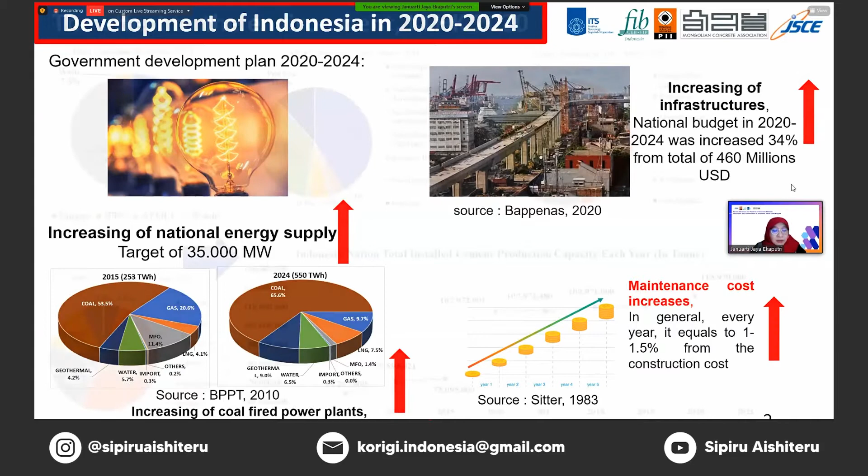As Professor Nakamura explained yesterday, we have to spend more attention maintaining our infrastructure during its service life. So it is not cheap, because every year it costs around 1.5% of its construction cost. Actually, we have another problem too, as also explained by Sagawa Sensei.

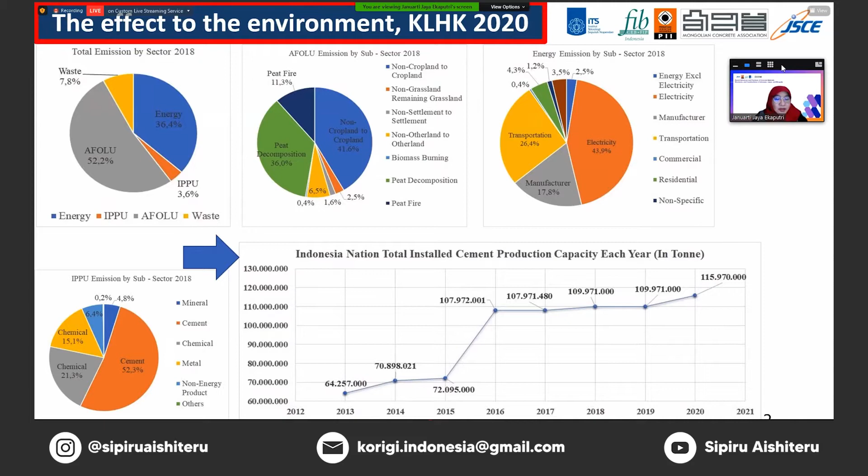Here, we face some problems to be solved. We must decrease emissions and consider the environmental problem. In the concrete industry sector, sometimes using river sand is not recommended because of the instability of rivers in some places. As we are in a tropical country with a very long coastline, durability and hot concreting are also additional problems.

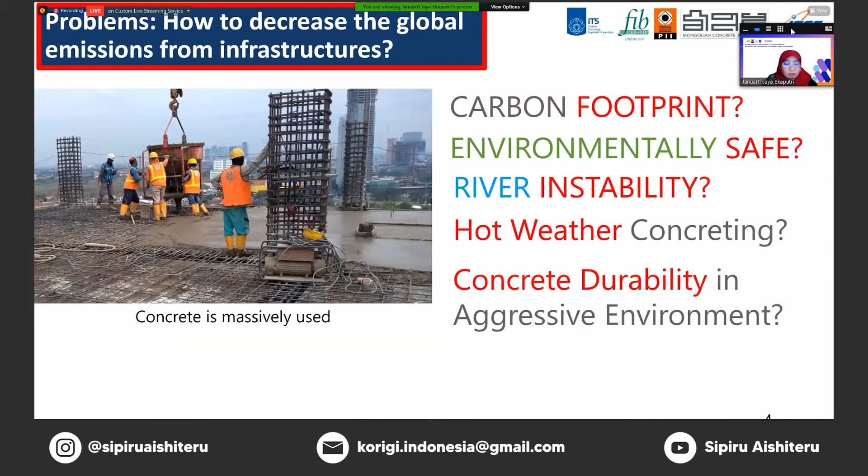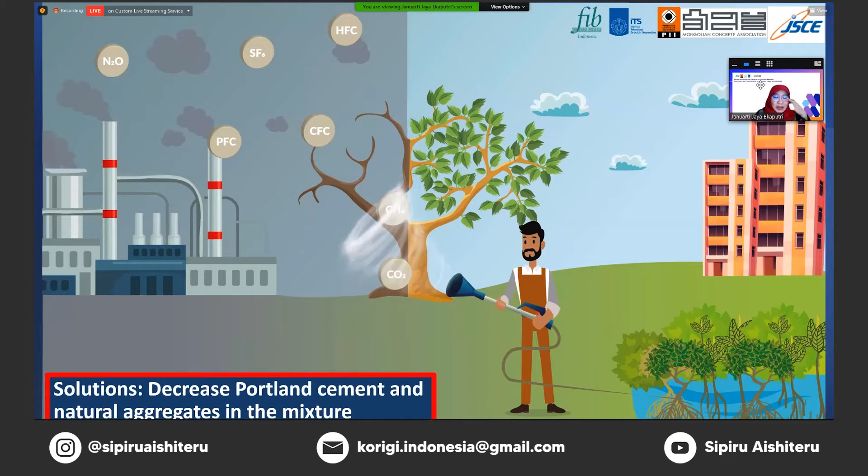Let me show you our experience utilizing coal ash as much as possible to solve this problem. We increased the utilization of fly ash in concrete as a main replacement, as a cement substitution, up to 50% by cement weight. It is not as much as Sagawa Sensei's explanation before, but we have done our best. It has both positive and negative effects on the concrete.

It increases the strength at later age. It also lowers the porosity and decreases the temperature of hydration. However, as a pozzolan, it has lower strength at early age and contributes to high shrinkage, and makes the workability lower if we use more than 30% by cement weight.

We also use bottom ash as a sand replacement up to 25% to get its property of internal curing in the concrete. But of course it has negative effects on the concrete, very similar to fly ash. And we know it is a porous material, so it must contribute to higher shrinkage in the concrete.

Then we have to find solutions. We have to find the antidote for the coal ash effect. So we use microbes in the mixture. In most of our experiments, we use Sporosarcina pasteurii as the bacteria, especially for concrete.

And then we use these microbes, and it is also found that the microbes create gas as a metabolism product during casting, so it increases the workability of the concrete during casting. However, it requires a lower hydration temperature.

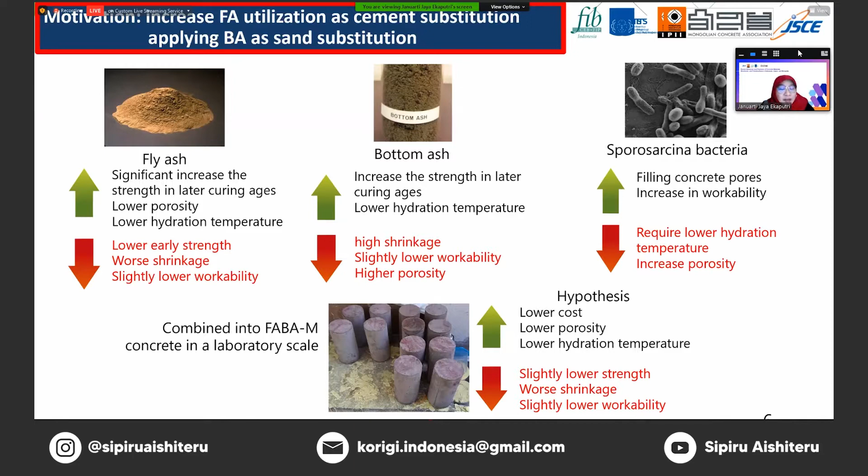I have to emphasize here the microbe selection. Obviously we have to use non-pathogenic aerobic bacteria; we don't want to get sick because of this kind of bacteria, so it should be non-pathogenic. It has to work to fill the pores if oxygen exists. As concrete containing lime, the pH may be a bit higher, and the microbes have to withstand high alkalinity. So we isolated the bacteria from a lime source, a very local place in East Java.

This is the reaction that occurs, I will show you the reactions. When we insert the microbes in the concrete, the carbon dioxide from the bacteria can react with portlandite. There is also the urease enzyme, and it reacts with the portlandite to create calcium carbonate. So the calcium carbonate precipitates in the concrete pores to make the concrete denser because it reduces the concrete pores. Okay, I will go to the next slide.

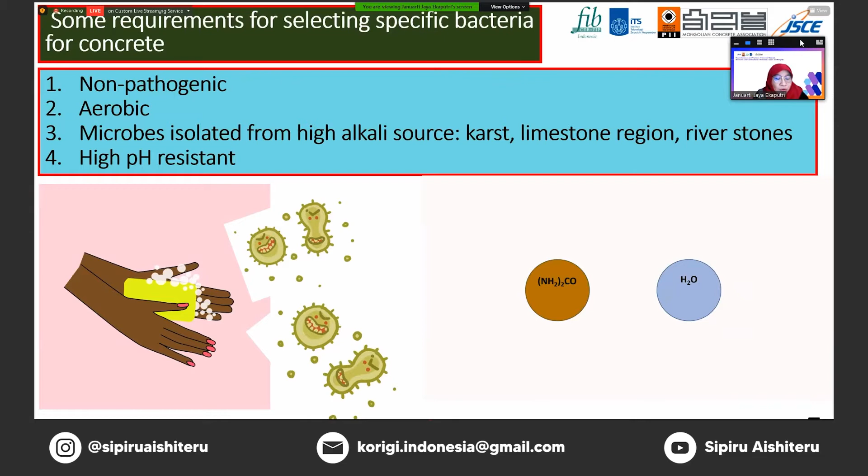We have found that some local bacteria in Indonesia can be very useful to increase concrete performance. We have Bacillus subtilis, and even Bacillus safensis, to produce calcite. We can even find aragonite in the concrete pores, which is a very hard and strong material. It fills the interfacial transition zones in concrete, so there is no gap between the aggregates and the concrete matrix. We were lucky, during the SEM analysis we captured the binary fissions of the bacteria inside the concrete.

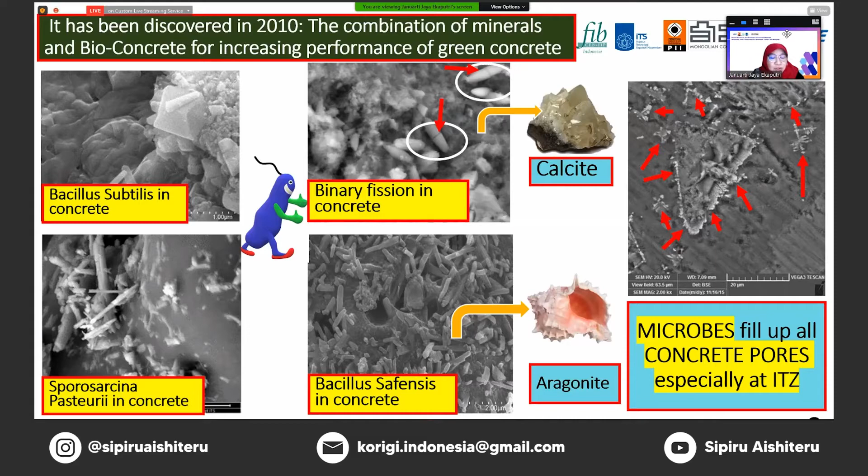We have also another innovation using sodium hydroxide to increase the pH of concrete. Usually cement contributes to a pH of 12.5 to 13 in concrete mixtures during casting. By using fly ash and bottom ash, the bacteria may decrease the pH in concrete. So we use a very low concentration of sodium hydroxide, 0.03 molar, introduced during casting and also as a water substitution. It also increases the reactivity of the fly ash.

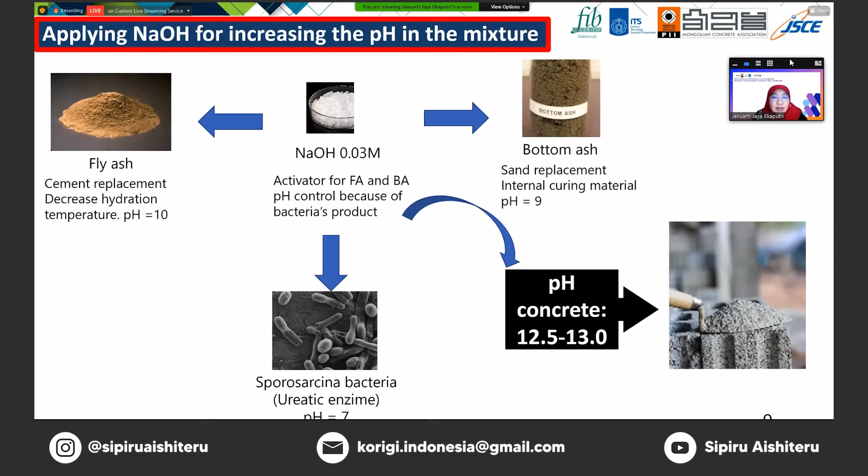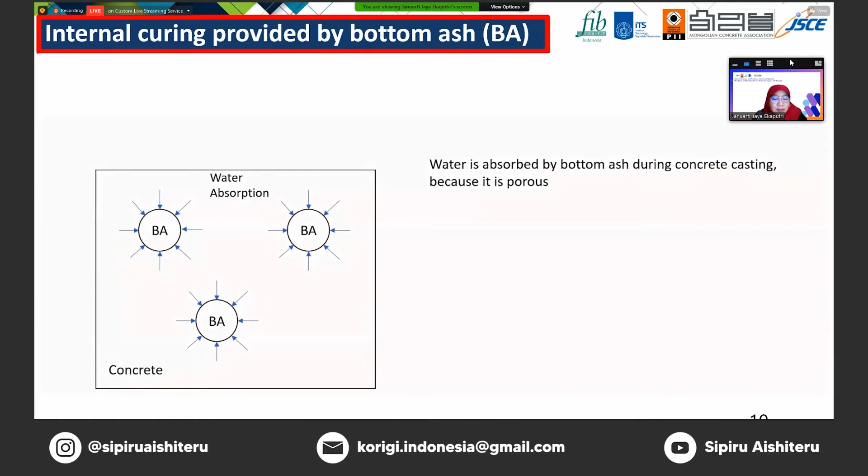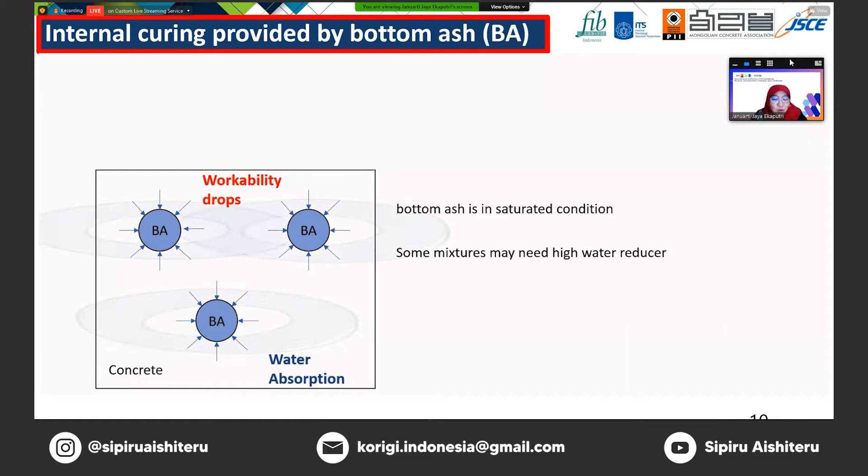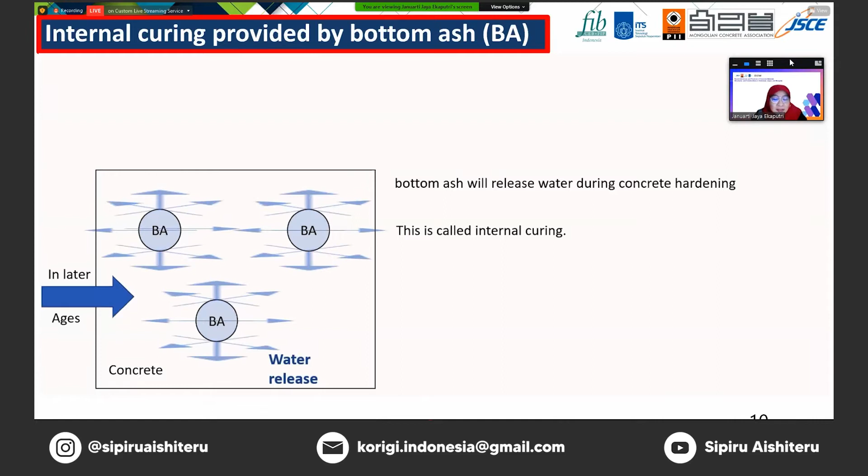I also have schematic simulations. This is the internal curing effect from bottom ash that we expect to occur during the hydration of the concrete. It works as a sponge: it absorbs water at the beginning, lowering the water to cement ratio and maybe the workability, but then it releases moisture gradually at a later age. This is called internal curing, and it contributes moisture to guarantee the next chemical reactions because of the pozzolanic reaction and the bacterial activity.

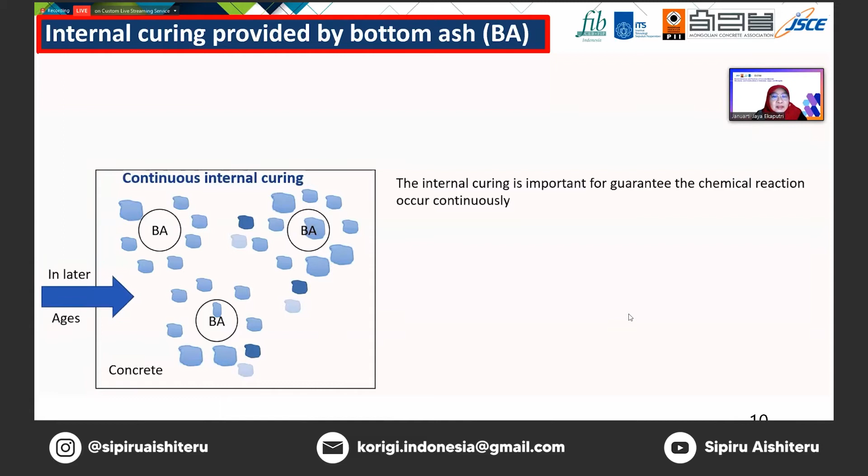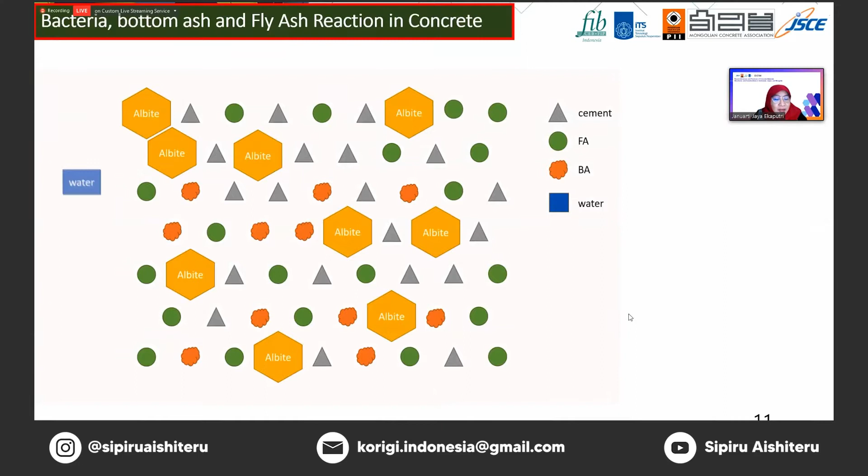This is a bit complicated, but I tried my best to make simulations of the schematic reactions during the first hydration and at a later age of the concrete using bacteria, sodium hydroxide, and coal ash. The bacteria produce CO2, which reacts with the portlandite to produce calcite, and the fly ash reacts with the portlandite to produce new calcium silicate hydrate. At the end we have a denser concrete, and the bottom ash continues to guarantee internal curing inside the concrete during the hardening process.

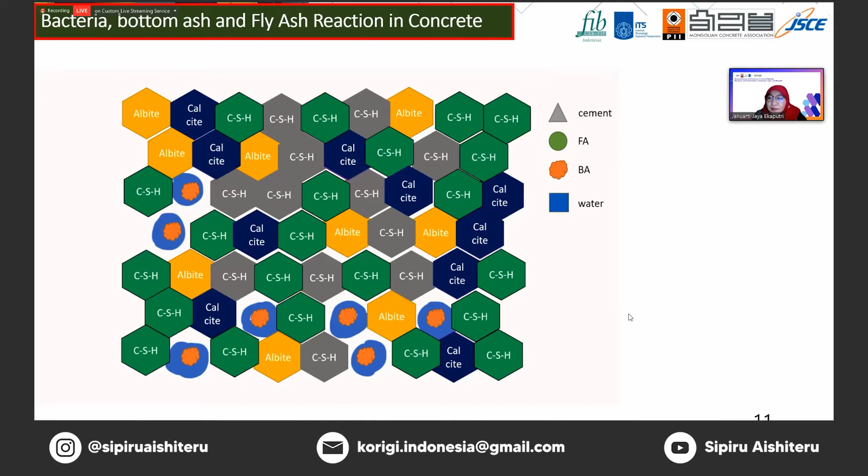In the next slide, in our experiment we use a mix design to obtain a strength of 25 megapascal in 28 days. As a cement replacement, class F fly ash was used at 40% and 50% by cement weight. Bottom ash was used to replace only 10% of sand by weight, but that's actually quite a high amount.

We made a certain sequence of mixing the materials during casting; it is very important because it affects the workability of the concrete. We place fly ash first, then mix with sodium hydroxide, then continue with all aggregates, followed by cement and superplasticizer, and also add water containing superplasticizer in the final mixture, and also put in the bacteria. We also use a different superplasticizer amount: black here is the non-bacterial concrete, and red contains bacteria, since we keep the bacteria content constant at about 400 milliliters per cubic meter of concrete.

Because of the different workability using bacterial and non-bacterial concrete, we used a different content of superplasticizer. For non-bacterial concrete we put 0.33% by binder weight, and we decreased the amount of superplasticizer to only 0.1% by binder weight for the bacterial concrete.

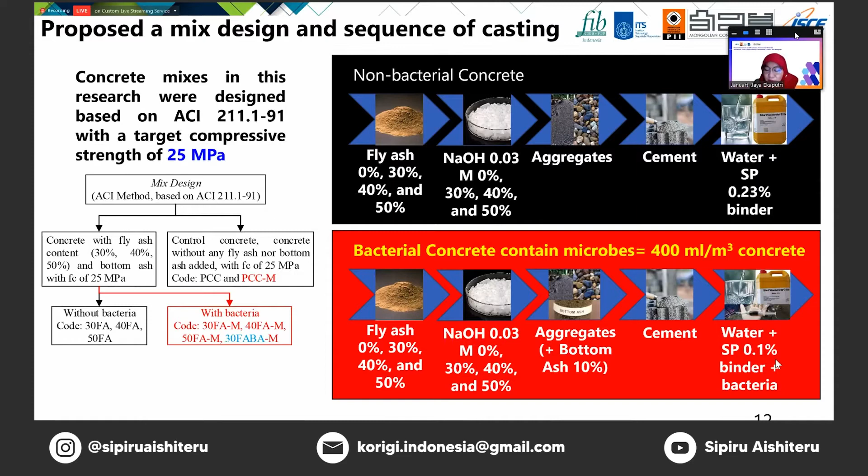We made cylindrical specimens for the strength test and the shrinkage test. We also prepared cubical specimens for monitoring the hydration temperature in 24 hours after casting. In total we have 272 specimens, and this is the result.

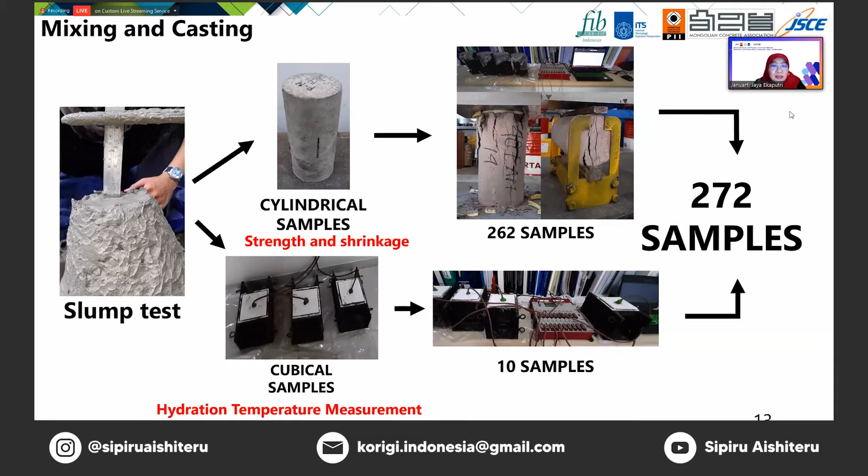The slump of concrete is very important to analyze. As the ash content increases, in order to achieve good workability for the slump target of 10 to 14 centimeters, we add water as the fly ash content increases, since the ash indeed absorbs water during casting. As expected, bacteria increase the workability of the mixture. We can see here, the blue one, the specimen containing 10% of bottom ash.

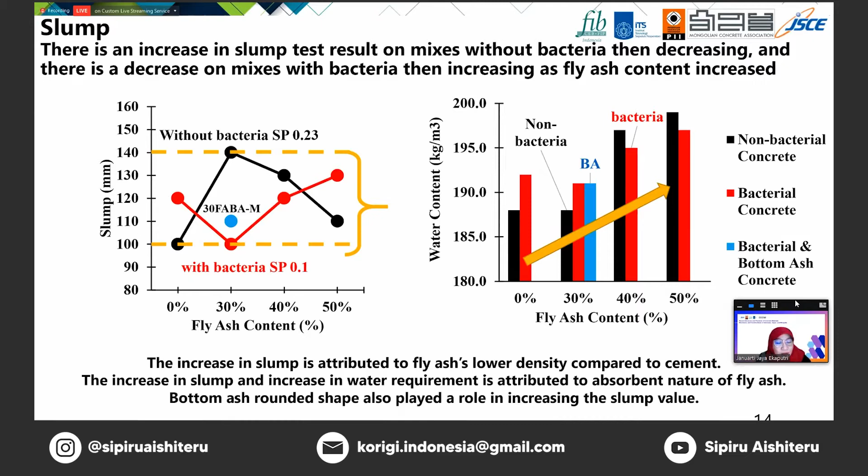And this is the result of temperature monitoring during 24-hour hydration sensing. The ash helps a lot to decrease the temperature, up to 13%.

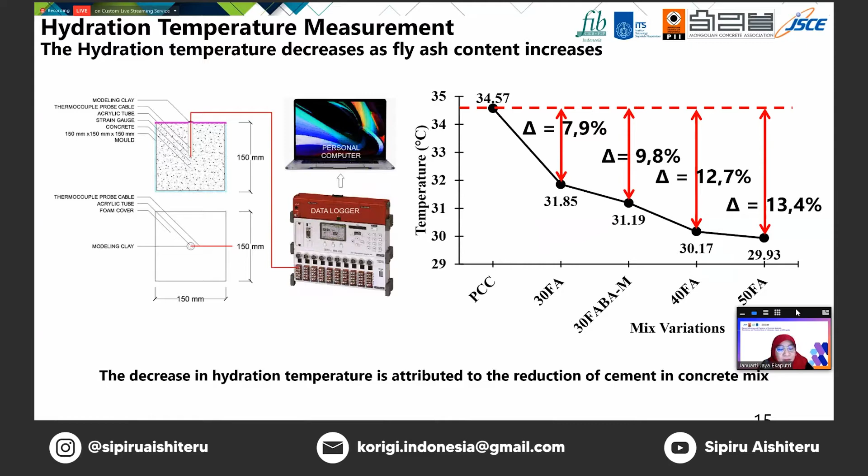Something very interesting to see, I used my previous experiment in Japan at the University of Tokyo to measure the shrinkage of concrete for 10 days. I put the embedded strain gauge in the center of the concrete, and we can monitor the shrinkage during hydration of the concrete for up to 10 days.

As the ash content increases, we add more water in the mixture, so the shrinkage increases too. But it is very surprising to see that the specimen with only 30% fly ash and the specimen containing bottom ash show lower shrinkage than the normal concrete. This is caused by the ash content and good compatibility and good compacting of the mixture during casting.

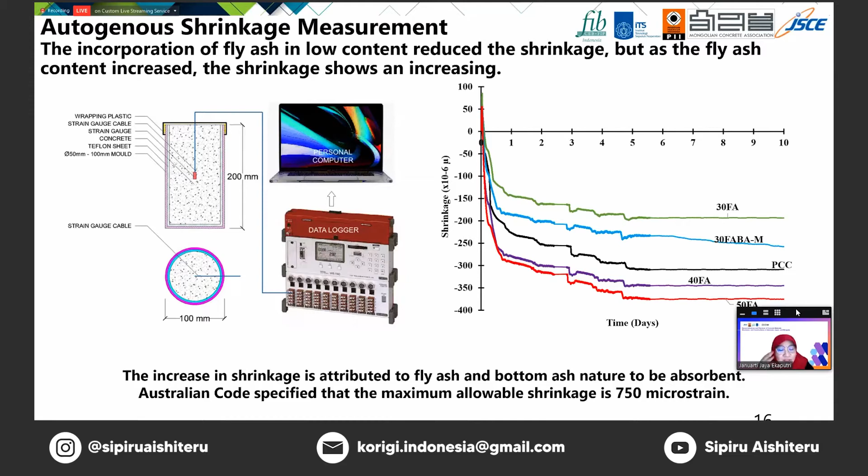It is also very interesting to see that if we do not control the slump, and just keep the water to cement ratio constant in our mixtures to guarantee moist curing up to 7 days, we found there is no difference using 30%, 40%, and 50% fly ash as cement replacement compared to the control specimens. There is also a report that using microbes in concrete, shown on the right side, doesn't affect the shrinkage. So there is no difference using bacteria or non-bacteria in the shrinkage measurement.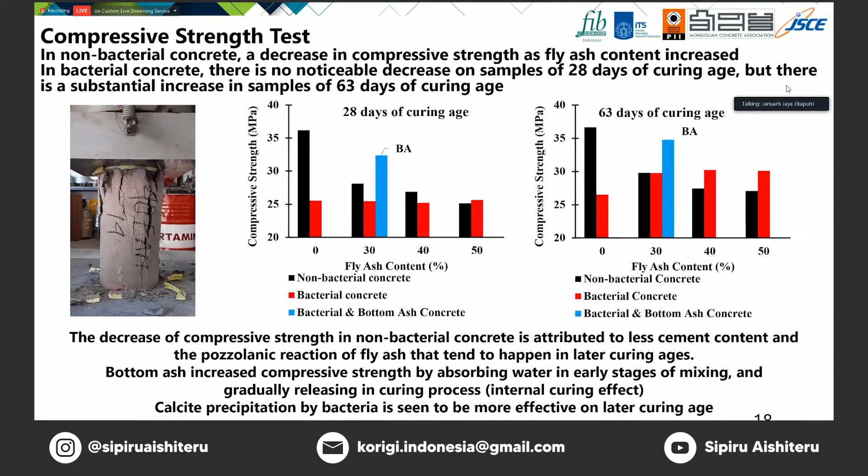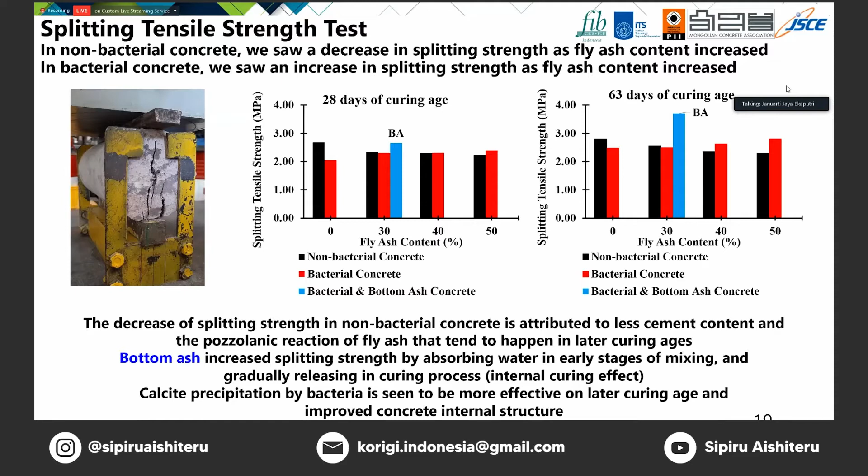And as expected, because of the denser concrete pores, a higher split tensile strength is shown by the specimen containing bacteria and bottom ash, as shown in this result. If we analyze the microstructure of the concrete, we found that at later age, as the ash content increases, the pores become denser, reducing the porosity of the concrete.

Especially if we have bottom ash incorporated with the microbes, we'll see the product of bacteria and the role of sodium hydroxide in the next slide. Albite, as a product of aluminosilicate, reacts with the reaction product between sodium hydroxide and fly ash in the early age, and increases as fly ash is present in the mixtures.

The product of bacteria was also found, as we can see there is calcium carbonate content in the result, especially with the red specimen containing bacteria. On the other hand, we can see a slight decrease of portlandite as a product of cement hydration. Why? Because it reacted with bacteria and silicate in fly ash to produce new calcium silicate hydrate and precipitated calcium carbonate in the concrete pores.

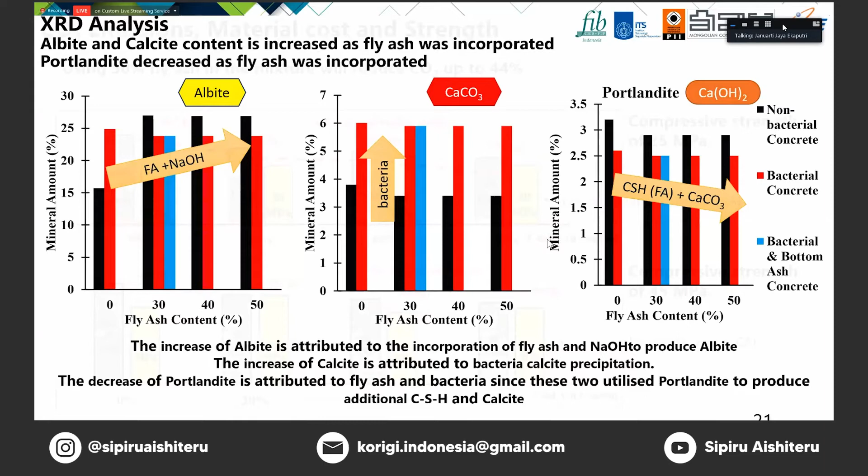Finally, we compare the results of normal strength and higher compressive strength. We found there is a decrease of CO2 emissions by 44% for all specimens using 50% fly ash in the mixtures. The cost of material is also reduced by 18 to 26%. This is a very good contribution to the concrete ready-mix industry to get carbon credits.